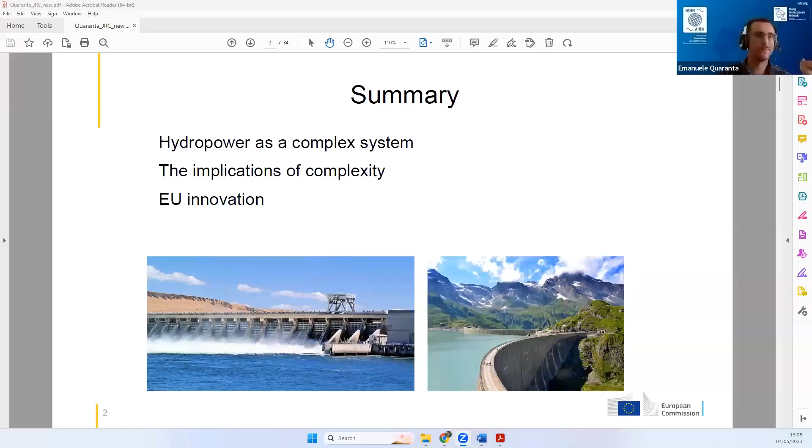I hope you all see the screen. Yeah, yes, thank you, Francisco. I can see it. Okay, I can start. Thank you very much for inviting me to talk at this webinar.

I am Emanuele Quaranta. I work at the Joint Research Centre of the European Commission. My task is to perform scientific assessment, in this case on hydropower, in order to support the policy-making process. Next slide, please.

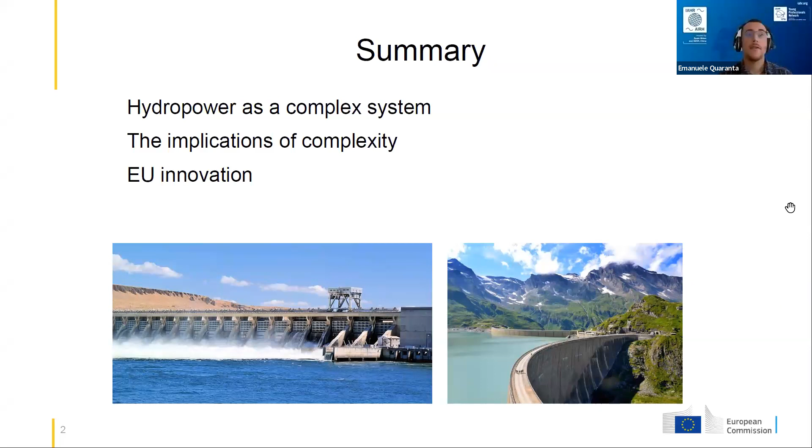Here is a short summary of my presentation. We talk about the complexity around the hydropower sector. Then we talk about the implication that this complexity generates, and then some slides about the innovation in the European Union. Next slide. So what is hydropower? Just a brief introduction. Hydropower converts the energy of water into electricity thanks to the rotation of a turbine and an electric generator. Next slide.

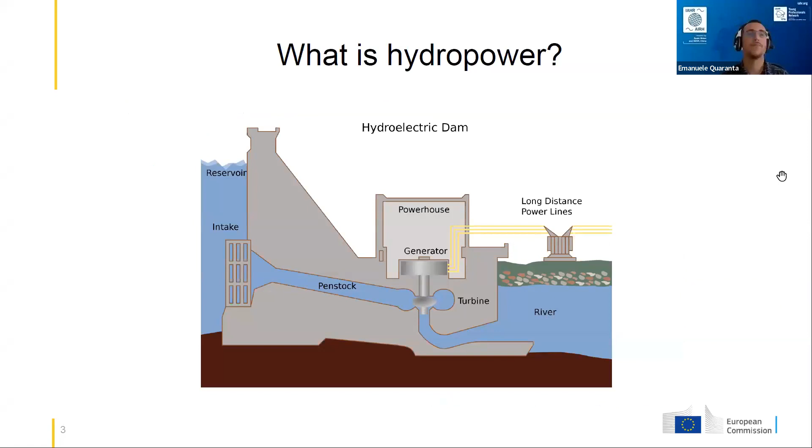We can distinguish different types of hydropower. On one hand, we have large hydropower, typically with installed power above 10 megawatt. And within large hydropower, we have hydropower plants with reservoir and also run-of-the-river hydropower plants without storage capacity or with a little storage capacity. Next slide.

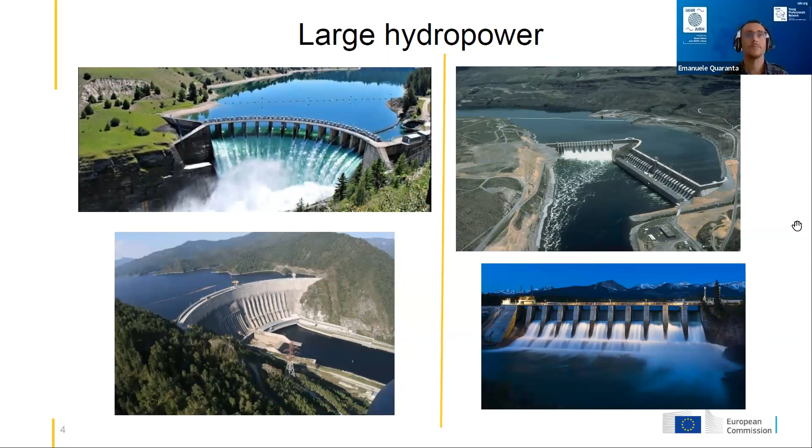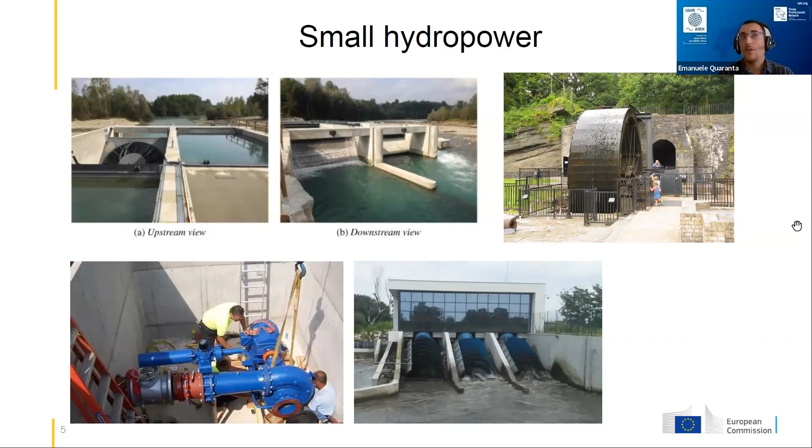On the other hand, we have small hydropower. Small hydropower plants are typically below 10 megawatt; it depends on the definition in each country, but 10 megawatt is more or less the common threshold. Typically small hydropower plants are developed, for example, in existing barriers, in mills, in water and wastewater distribution networks, but can also be built as new plants in rivers. Next slide.

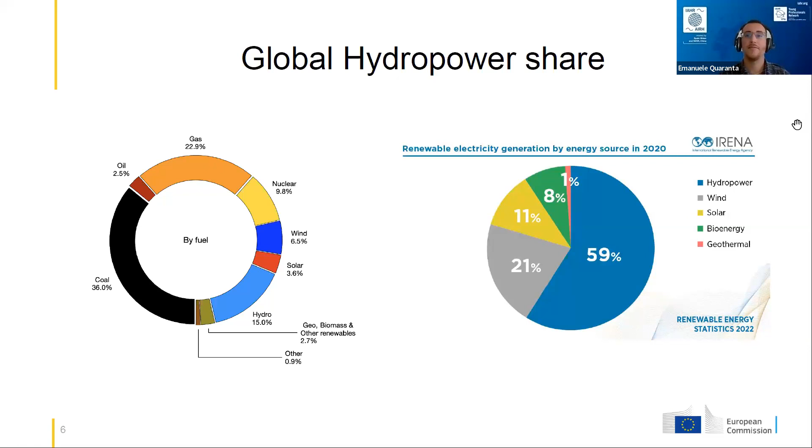Here you can see the role of hydropower in the world. The electricity generated by hydropower plants covers more or less 15% of the total global electricity generation. And if we only look at renewable energy technologies, hydropower share is more or less 59%. But together with renewable energy generation, hydropower also provides storage capacity and flexibility. Next slide, please.

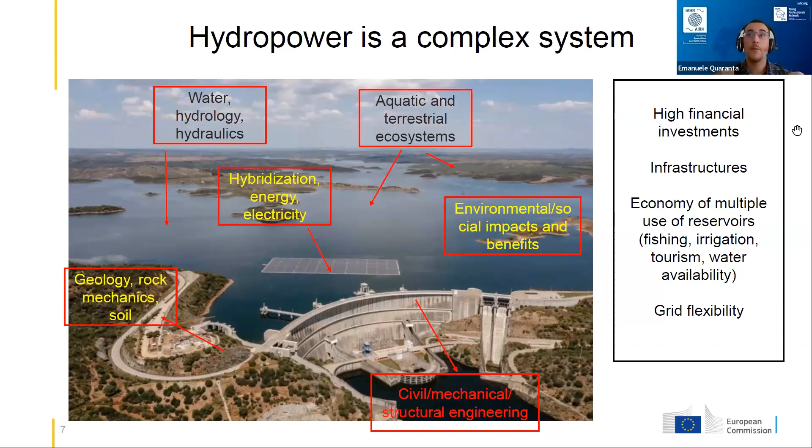We also have to consider the geology, the rock mechanics of the soil around the hydropower plant. We talk about civil, mechanical, and structural engineering. Then we have also all the economy and the operation, for example, of multiple use reservoirs. We talk about new infrastructure, flexibility, financial investment. So you can understand how hydropower is a very comprehensive and cross-cutting topic. Next slide, please.

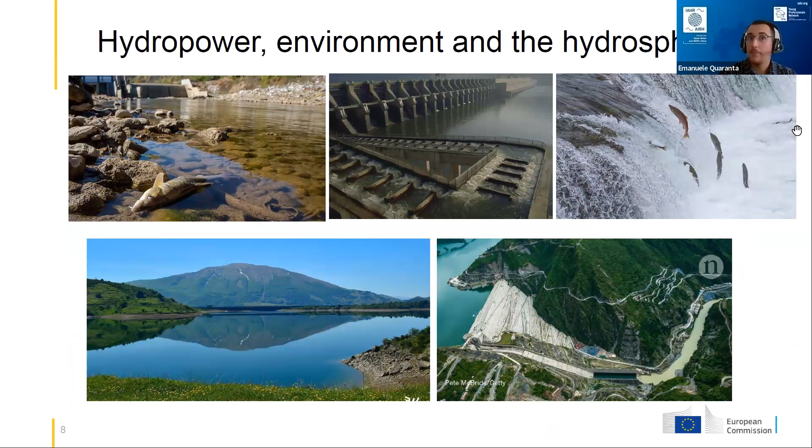For example, hydropower interferes with the environment and with the hydrosphere, generating sometimes impacts but also benefits. For example, hydropower may hinder fish migration, but this is the problem of any barrier, but can also, thanks to the reservoir, provide a new microclimate that can be suitable for the proliferation of new plants, for example. Next slide, please.

Hydropower also interacts with the oceans, first of all by trapping sediment and fish, but there is also evidence that hydropower, thanks to the trash racks inside hydropower plants, helps in removing plastics from rivers. You have to consider that most of the plastics inside the oceans come from rivers, but most of the plastics that reach the rivers remain inside the river, thanks to the presence of barriers and especially thanks to the role of hydropower

in removing these plastics. Another case is, for example, the pumped hydropower storage type, and there is an emerging trend in building the lower reservoir in the ocean.

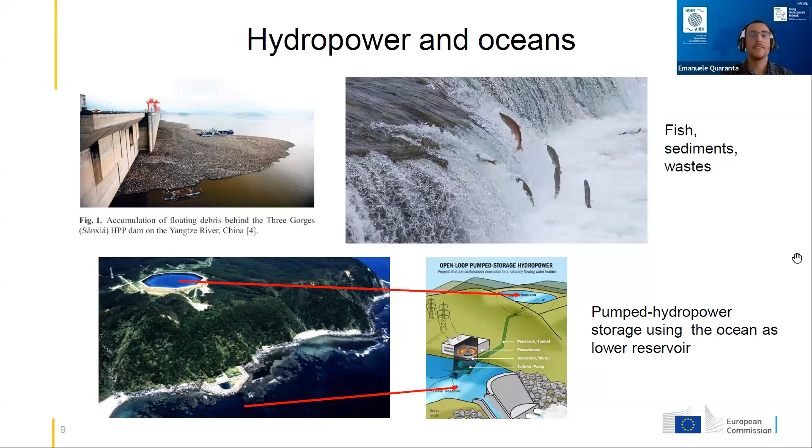Then, always talking about hydropower and the ocean, most of the energy technologies used to convert the energy of waves, currents, and tides into electricity come from the hydropower sector, like, for example, hydrokinetic turbines.

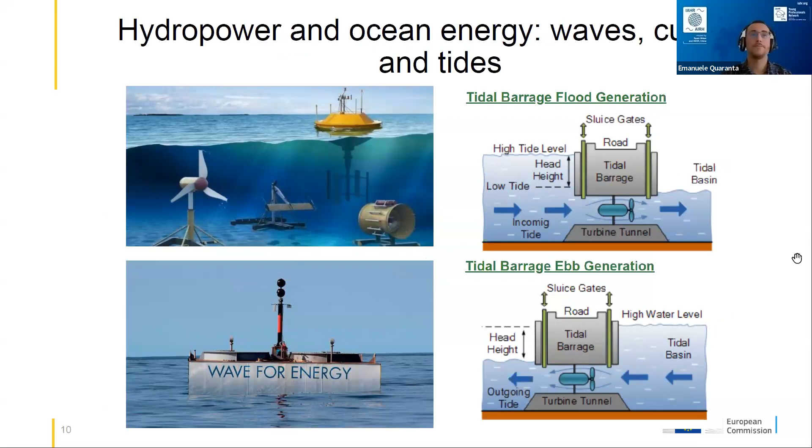Hydropower also interacts, especially water reservoirs in general, with the atmosphere by means of evaporation and sometimes also greenhouse gas emissions from the reservoir. And in the next presentation, Debbie will talk about this in more detail.

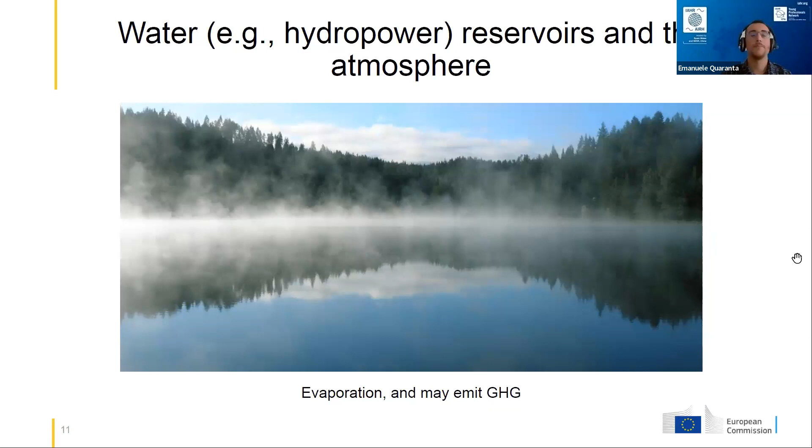Hydropower interacts a lot with society, providing electricity, providing water storage, water needs, also tourism, for example, I would say the trekking around water reservoirs. But in some cases, and again I will talk in general about water reservoirs rather than just hydropower reservoirs, it has also generated impacts, for example, when a large reservoir has submerged the upstream area, submerging, for example, villages upstream.

Hydropower can be hybridized with other energy sources, for example, with photovoltaics, both as floating photovoltaics on reservoirs, but also by installing photovoltaic panels on the dam surface. Hydropower can be hybridized with batteries. We can also extract heat from the cooling system of the generator and reuse this heat. So hydropower has a great potential of hybridization with other technologies.

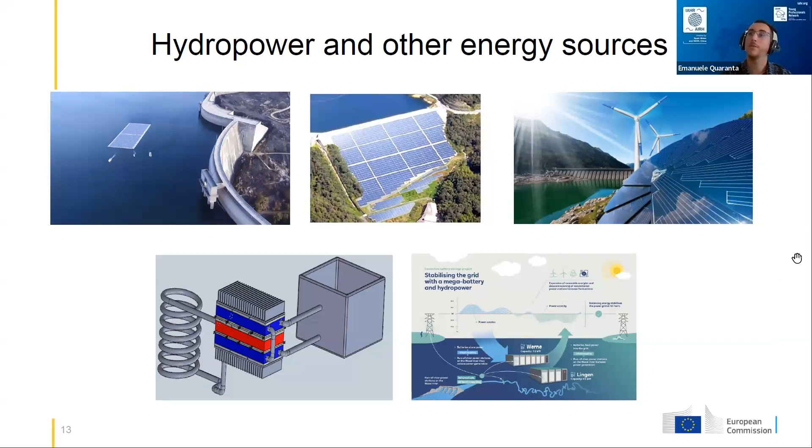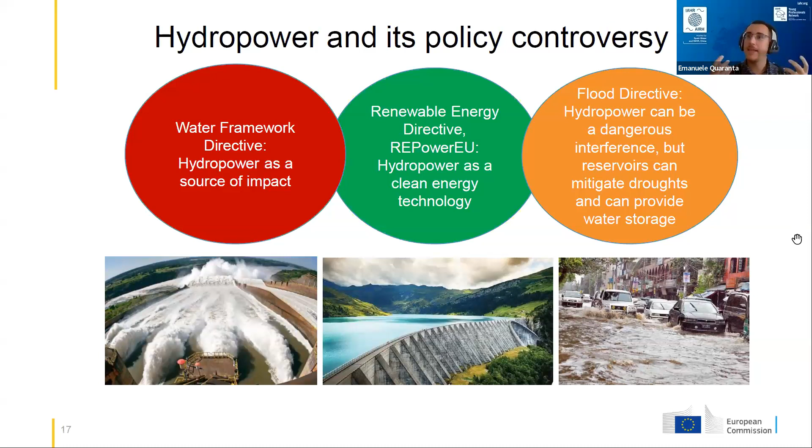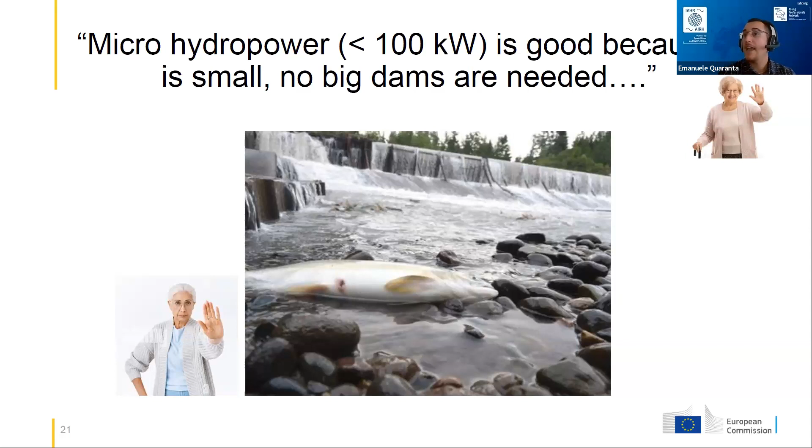This is the first example, and these are all statements that I hear every day. People always claim that micro hydropower, so very small hydropower plants, are always good because they are small, and so no big dams are needed. But this is not always true, because we have to consider, for example, also the cumulative impact of barriers. And also small hydropower plants can have an impact if they are not developed in a sustainable way. Next slide, please.

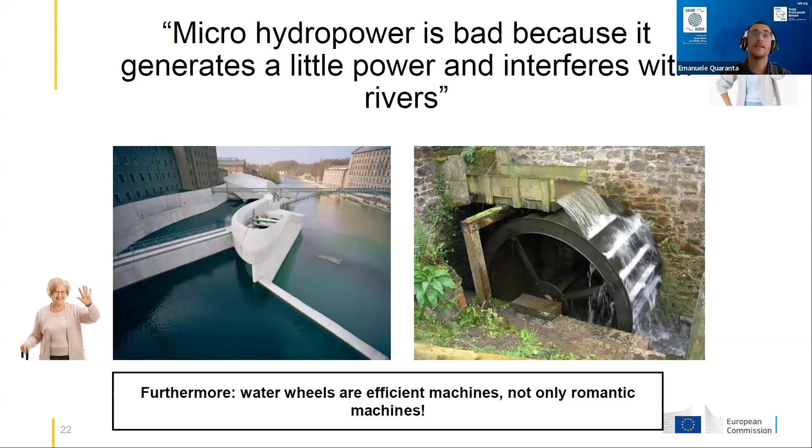Another statement is the one on hydrokinetic turbines, claiming that hydrokinetic turbines are a clean energy source. They do not need a dam and they can be installed in flowing water, so they are sustainable and a good strategy. Yes, hydrokinetic turbines do not need dams, but we have calculated that their potential, for example in the European Union, is not significant. So we cannot invest so much in hydrokinetic turbines, because they could be a good solution in local contexts, but will not save our energy system.

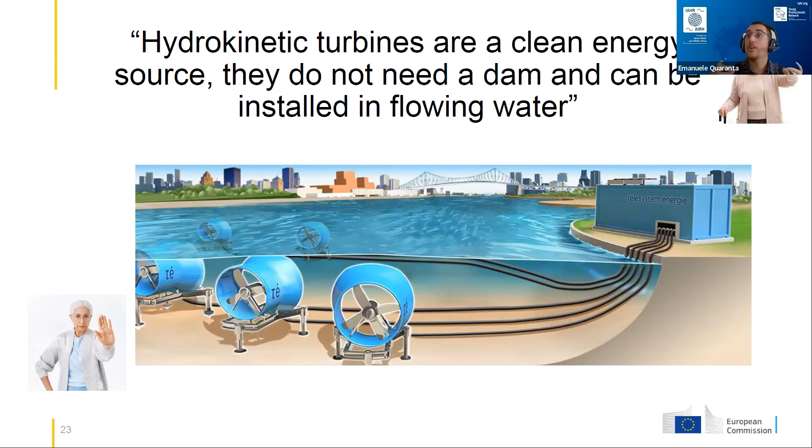Next slide, please. Here I took this picture from the report of the project Hydropower Europe, coordinated by Anton. Another statement that I sometimes hear is that wind and solar energy technologies are better because they do not harm fish. I would say yes, but do not forget about the birds when we talk about wind energy. Another example: in the first picture, the carbon emissions per kilowatt hour of hydropower are among the lowest.

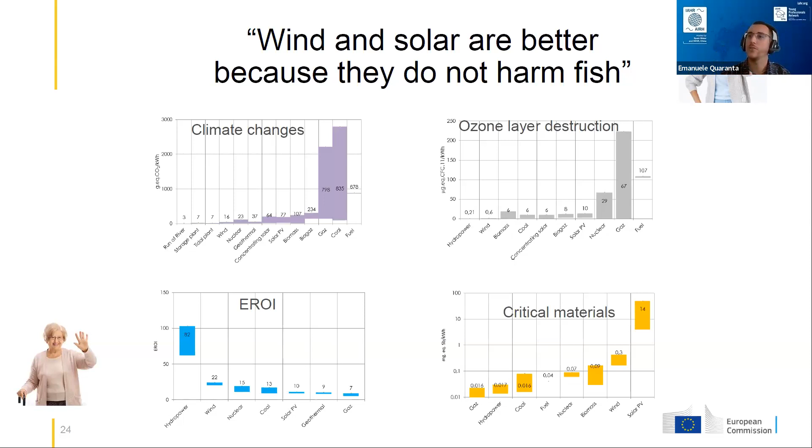If we look at the energy return on investment, in the picture below on the left, we can see that hydropower has the highest value, so it is the most convenient. If we look at critical materials, hydropower does not use critical materials except in very exceptional cases, but solar and wind use a lot. So we have to be comprehensive, not consider only fish, but all the possible interactions of any energy technology with the environment. Next slide, please.

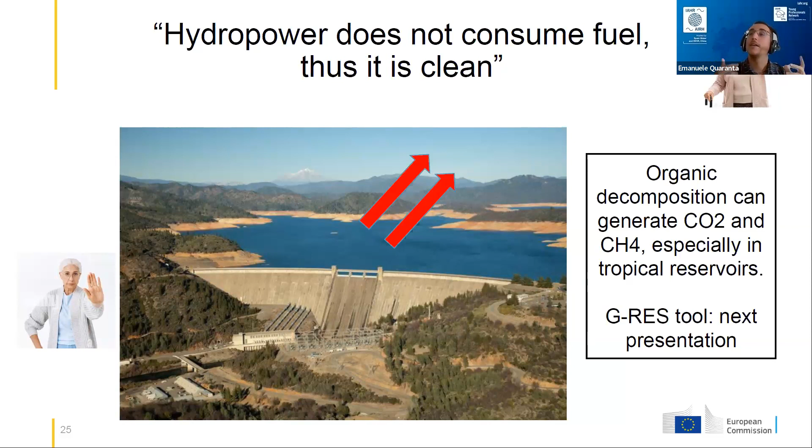Here again, another example of an incomplete statement is the one that claims hydropower does not consume fuel, thus it is clean. I may say, in part, yes, but some water reservoirs, not only hydropower reservoirs, can also emit methane and carbon due to organic decomposition in the reservoir. And Debbie will talk about this in the next presentation. Next slide, please.

Another example is: hydropower traps sediments, so it generates impact, so it is not sustainable. I will say, yes, it traps sediments, but, as I said before, it also traps plastics, and so can help in cleaning rivers. Next slide, please.

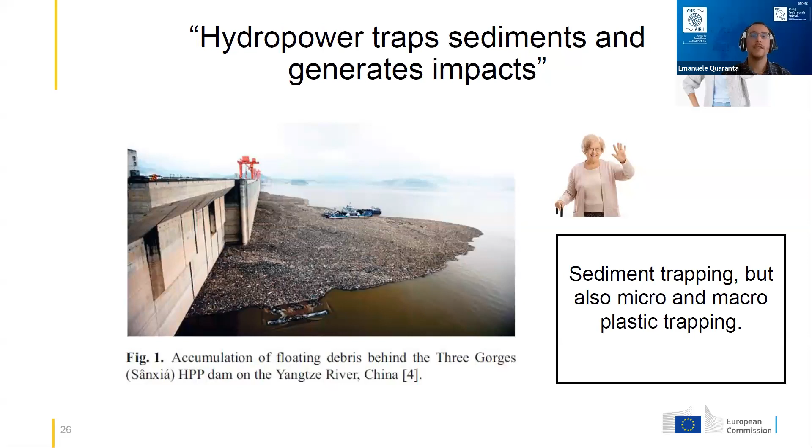This is another example. People who claim hydropower is responsible for river fragmentation. I will say hydropower, yes, can contribute to river fragmentation, but it's not the main one responsible. I took this slide from the ICOLD database, elaborating data from the ICOLD database. You can see here that only one third of water reservoirs are for hydropower.

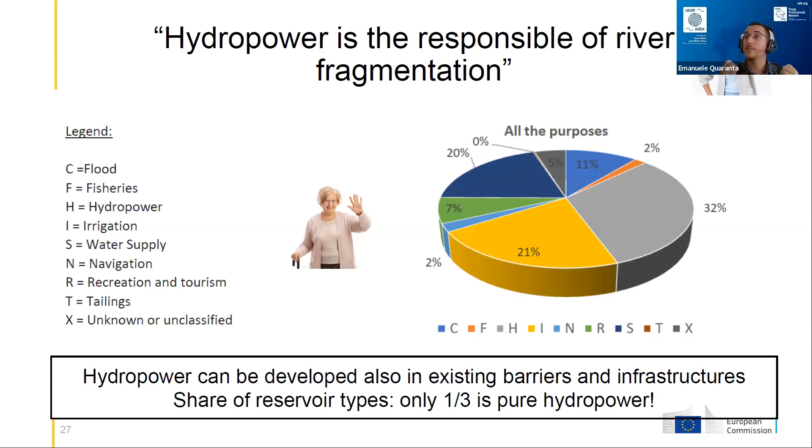And I can add this: the AMBER database, a European project, identified more or less 600,000 barriers in European rivers, but less than 10% are for hydropower. So the problem of river fragmentation, yes, also depends on hydropower, but hydropower is not the main one responsible. Next slide, please.

And again, in this context of sustainable hydropower, I am coordinating a research activity at the European Commission in order to identify the potential of sustainable hydropower solutions in the European Union, focusing on different strategies that do not involve the construction of new barriers. For example, we identified that by modernization of the existing hydropower fleet, we can add 40 to 50 terawatt-hours per year, more than 10% of the hydropower potential.

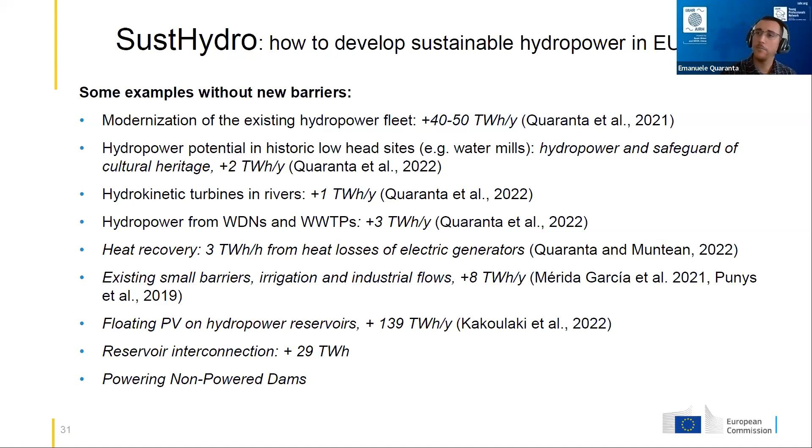We can exploit, again, existing small barriers, irrigation and industrial flows. We can develop floating PV, photovoltaics, on hydropower reservoirs. We can also interconnect existing reservoirs to create new pumped hydropower storage, adding more or less 29 terawatt-hours of energy storage. We can also power non-powered dams. There is not a clear assessment on this, but from some preliminary calculations, we can add more or less 10 gigawatts of installed power to non-powered dams. Next slide, please.

And then, the European Union is a hydropower leader, and this hydropower complexity and debate has been the main driver of knowledge and expertise development of the hydropower sector in the European Union, making European Union companies, projects, institutions, and academia among the most advanced in the world. So, thank you.

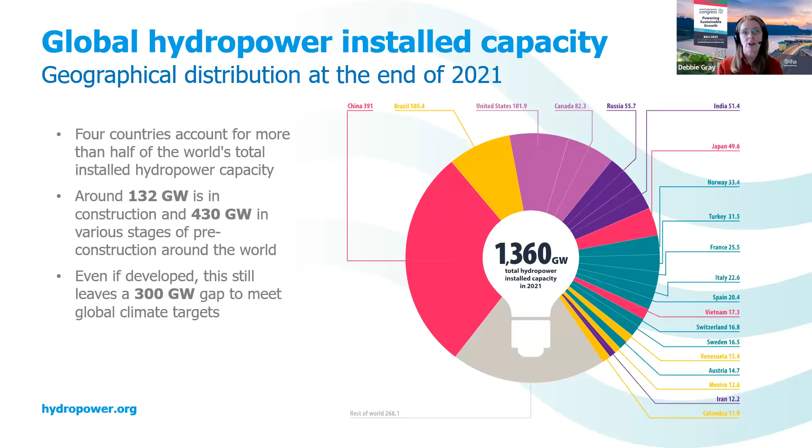Who's developing hydropower today? I think it's pretty obvious from this graph that China is far and away the country which develops hydropower at the most rapid pace. To put these numbers in perspective, China added in 2021 about 21,000 megawatts or 21 gigawatts. The installed hydropower capacity of Italy is about 22 gigawatts. France is about 25. So China added in 2021 almost the equivalent of Italy or France. And Italy and France have been developing hydropower for decades and decades. That sort of puts in scale how much China is developing.

It's not the only country developing, of course. Canada, where I am from, is still building new greenfield, as well as several countries in Asia particularly, as well as Brazil.

Now, I've been talking a lot about sustainable hydropower, so you might rightly ask, what do you mean exactly by sustainable hydropower? And Emanuele touched on this as well. And as he promised, I'll be talking about the Hydropower Sustainability Standard. The Hydropower Sustainability Standard was launched in 2021. Basically, it provides guidelines and tools to assess environmental, social, and governance performance of a hydropower project at various stages. That means it can be applied either to a project in its design phase or to a project which is even in its operating stage.

It's developed and governed by a multi-stakeholder council, so it's not a product of the IHA per se. IHA has been supporting it and has sparked its development, but it's not technically an IHA project. It's aligned with other ESG rules, such as those of the World Bank or the International Finance Corporation. And the sustainability team also has a training academy where they provide training for companies that want to report on projects or want to learn how to make their projects more sustainable.

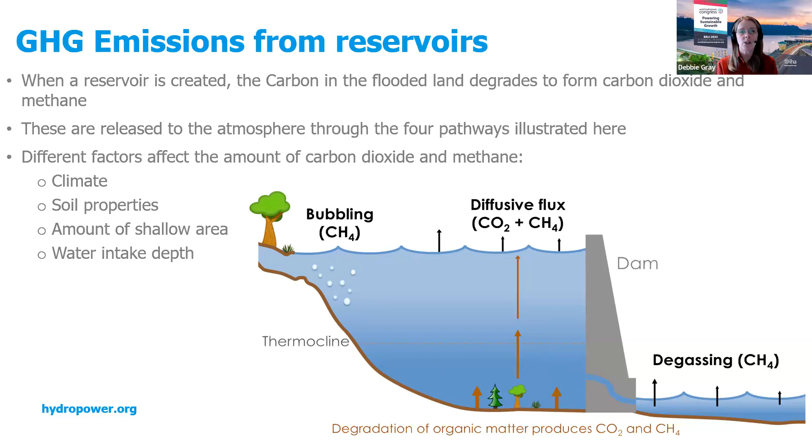Finally, the last pathway, which is specific to hydropower, is degassing. So what happens is there tends to be, in certain circumstances only, an accumulation of methane at the bottom of the reservoir. And when the water is passed through the turbines, then this methane can be released in what is called degassing. So those are the 4 pathways, what are the 2 compounds which are created, and then how are they released to the atmosphere. And there are different factors which affect the amount of carbon dioxide and methane. It has to do with climate, soil properties, the amount of shallow area, as well as the water intake depth.

Just a quick note, which might interest this group, about the scientific background of the development of the tool. We've known about the phenomenon of reservoirs releasing greenhouse gases for quite a while, and there's a conceptual paper which sort of brought together all the knowledge. This was in 2017, which set the framework for the G-res tool to be developed, based on a literature review of 223 reservoirs, because around that time a lot of reservoir operators were starting to take direct sampling and measuring the amounts of gases coming from the surface of their reservoirs or in the water column. So there was a literature review to look at the different characteristics of the reservoirs.

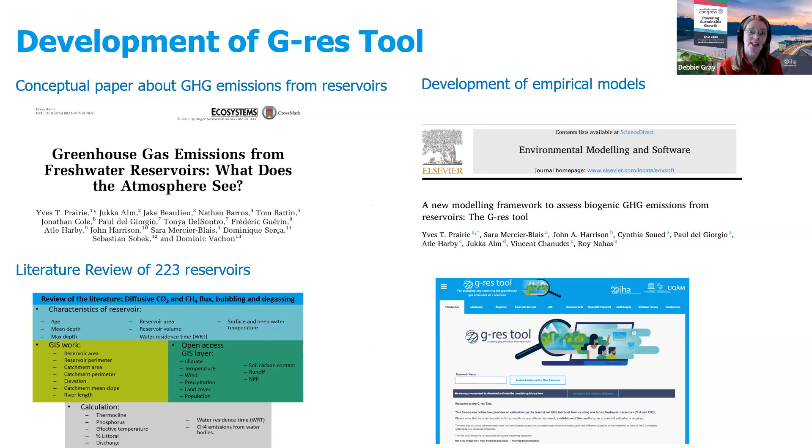From that came the development of empirical models, and those empirical models were the basis of the G-res tool. So just to reiterate, it's an easy to use, free online tool, and behind it are mathematical empirical models based on science. Some general trends about greenhouse gas emissions from reservoirs. There are some myths out there.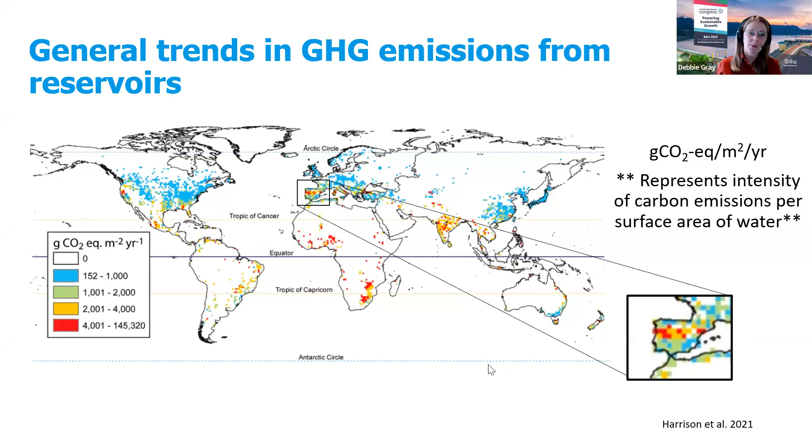And so there are some general trends, and you can see that typically in colder parts of the world, like in boreal regions, like in Northern Europe or in Canada, there tend to be fewer greenhouse gases emitted per square meter, whereas in hotter parts of the world, the emissions tend to be a little bit higher. But if you see the zoom here in the Iberian Peninsula, you can see that there are some reservoirs with relatively high emissions right next to some reservoirs with very low emissions. So this really brings home the importance of doing a site-specific assessment and not characterizing.

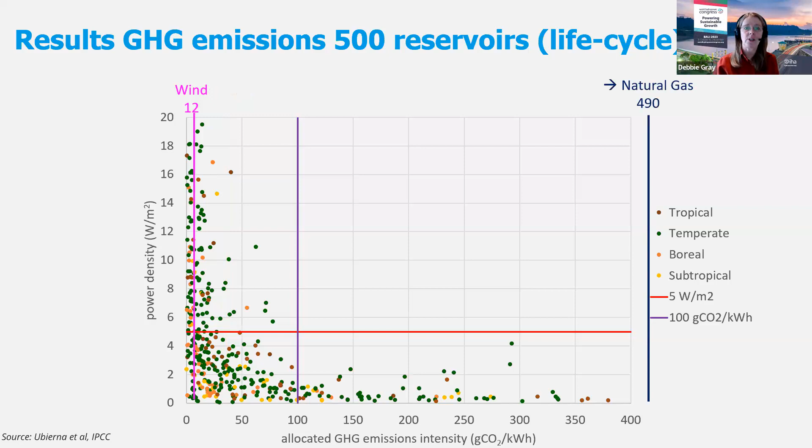Finally, recognition of the GRES tool: a certain number of taxonomies, including the EU taxonomy, the ASEAN taxonomy, as well as the Climate Bonds Initiative, which provides financing for low carbon projects. When they are giving their criteria for hydropower projects, they say that they must be low carbon, and they point to the GRES tool as a valid means of determining the greenhouse gas emissions. So this shows that the GRES tool, which has been around for about 6-7 years now, has gained a lot of credibility within the scientific community.